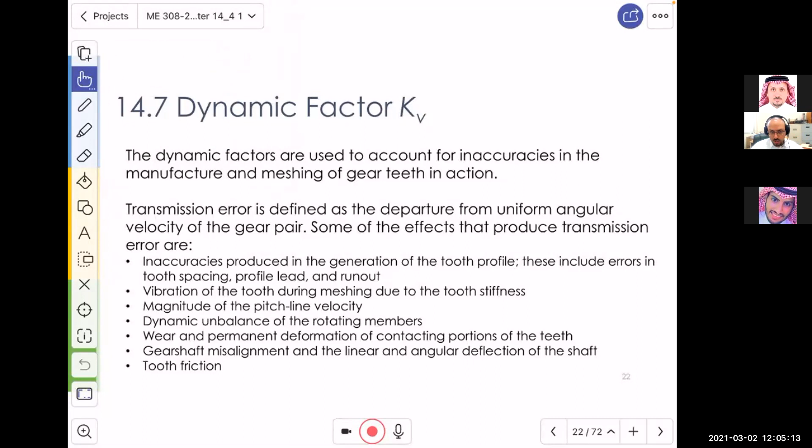Okay, so the dynamic factor, ya shabab, if we talk here, we said that the dynamic factor was established to include or consider effects due to the generation of the tooth profile, dynamic vibration, and so on.

And we said that what AGMA did, or at least we kind of touched on this, is that they established a quality number. And the quality numbers go from 3 to 7 for most commercial quality gears, and from 8 to 12 for high precision quality gears.

When we talk about high precision, it means something very critical, related to impact on lives directly, or significant loss. As I said, if you send a space mission to Mars and land a rover there, which happened like two weeks ago, you would not expect the rover to have commercial quality gears. There is no way, I wouldn't believe this. The whole mission costs you 6-7 billion dollars, and then you go and buy commercial gears from the market. I wouldn't believe this. And if the rover stopped working because of a problem with the gear, this is so funny, you understand?

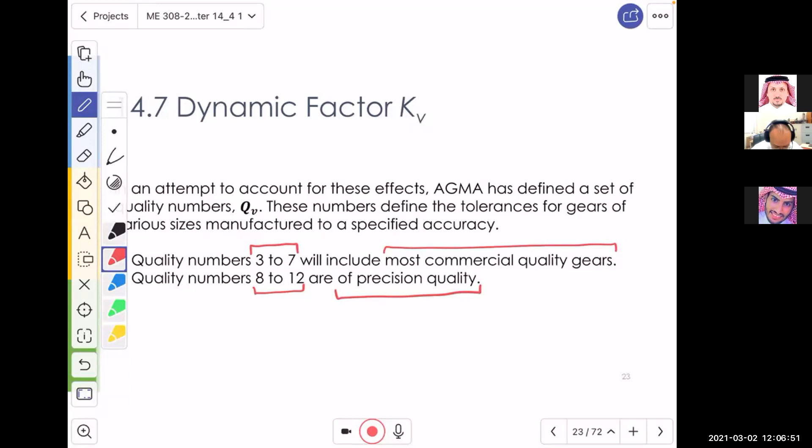But I want you to know the edge over here. So commercial means everything around us in the industry. But of course, there are sensitive places, sensitive industries, and this is where high precision might be used.

So if you go buy a commercial gear from the market, you would just use a suitable QV. Then from this, you will find B. And by knowing B, you can find A. And by knowing A, you can plug it in there with the velocity, and you will be able to find KV.

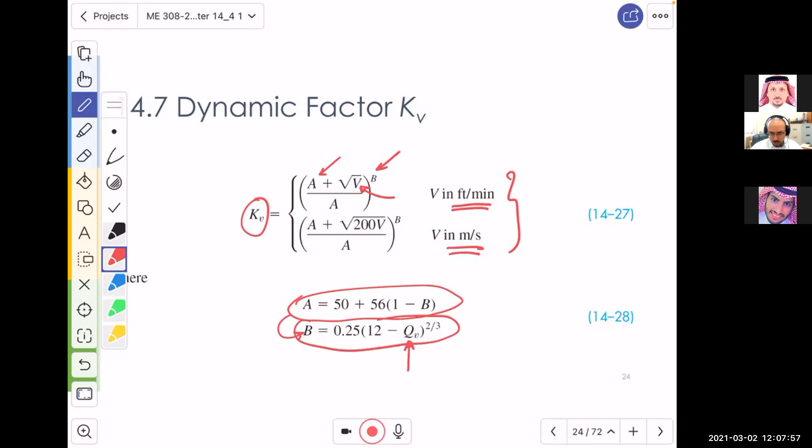What does bound the solution mean? If you are in a design problem and you want to know what is the maximum you're looking for, then this is it. And you know that, okay, I can't go for more, I can probably go down. So bounding the solution is always a very interesting and useful technique in design. This is why it's very important, I want to tell you.

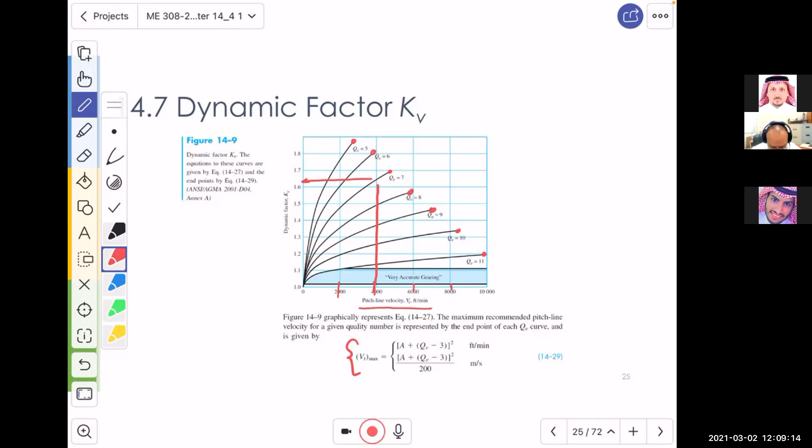Okay, the next one is the overload factor, KO. The overload factor, KO, basically allows you to consider any kind of effect resulting from an overload, other than the transmitted load that you are supplying through the gear.

If you have no idea, it is fair to assume that you have a uniform power source and the driven machine also performs in a uniform fashion or manner. And for that, this is your KO. So for uniform, we have 1.

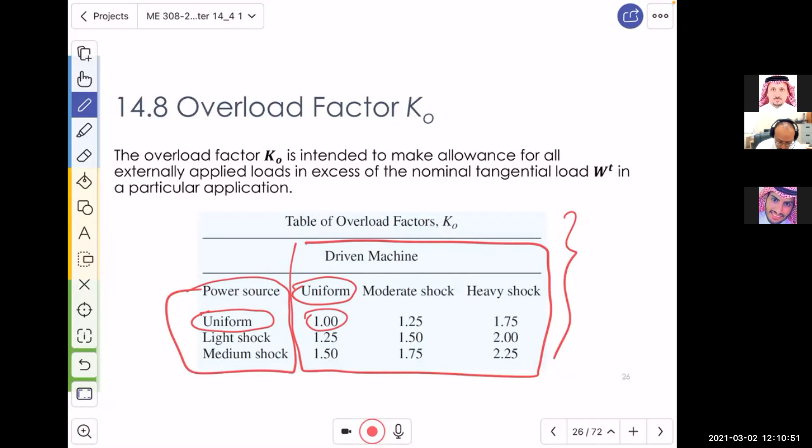If you have a uniform power source but a moderate shock-driven machine, that is possible, where you are supplying the power through a DC motor, and you have put a transformer, regulator, whatever, to ensure that the power source is always uniform. But the operation has moderate shock. Like, for example, if you use that gearing mechanism to drill, you cannot guarantee underground or through the wall that the formation is always uniform. So you may get through a sandy segment, and then all of a sudden a hard rock segment, and this changes the whole mechanism.

And there are plenty of things, for example wind. You can imagine that in places where there is significant wind, you can have this shock because of the wind, and it may be moderate or it may be heavy.

So if you are the designer and you don't know this, then you better go and ask your client, understand the need, and see basically what are you designing for. What are the possibilities? If you are just an analyst, go and ask him. Tell him, does your application involve shock? Is the shock coming from the source, or is it coming from the driven machine? What causes the shock? This is where you will understand how to estimate this.

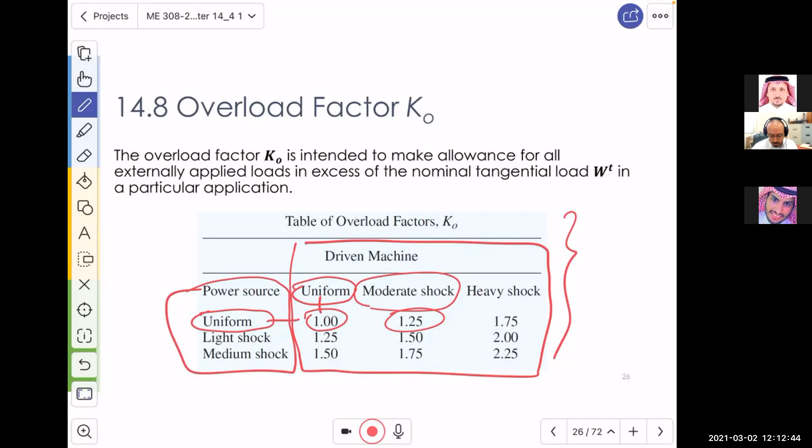If nothing was mentioned, you can comfortably assume that this is uniform. Okay? All right, but be careful. Never create a problem of your own. You're designing something, you know everything, and just because you are ignorant and did not think about shock, you say, no, I assumed it's uniform. I am the designer, I can assume whatever I want. Of course you can, but you may make the wrong assumption. So be careful with that.

So what does the surface condition factor depend on? It depends on the surface finish, which can be affected by cutting, shaving, lapping, grinding, and shot peening. Let me stop here for a few minutes, it's worth it. Shot peening is a very common, well-known surface modification process.

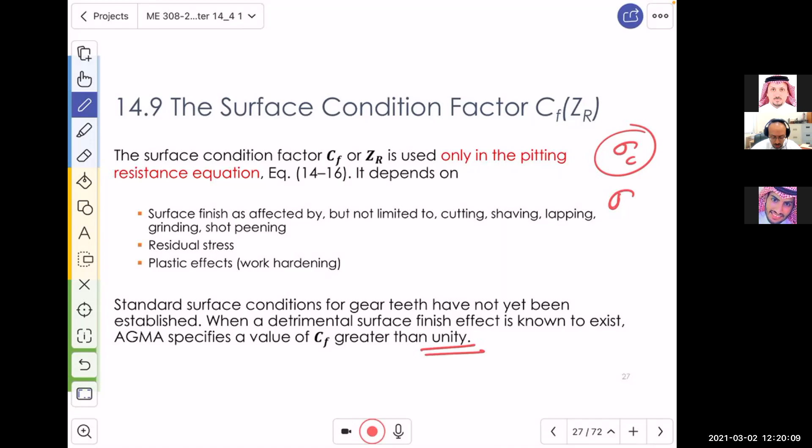So when should you assume it to be otherwise? Well, if you have a serious problem and you have a tabulated or figure or standardized analysis. If you don't have it, you need to consult a research or development center, a commercial lab, or a university to compute this effect for you. But as of now, it is 1. At least you got rid of it, you don't need to worry about it.

Now why is that? I would like you to remember always the fishing rod analogy. If you look not at the fishing rod, but the fishing string, the one you use in the reel — it's a little tiny plastic, and I need to be careful here, I'm not trying to compare apple to apple, because that little tiny string is made from a polymeric material. Polymers don't have grain boundaries like metals, so the concept of defects due to grain boundary, solidification, hardening, and so on doesn't apply there.

But what I would like you to understand is that this little tiny polymeric material is so strong, really strong, it's very hard to cut. It's mainly due to the fact that it is small. So even if you make the same string out of metallic material, that string being a few hundred microns in diameter is going to have way better strength than the same material making a bulk piece or even a tensile specimen. You take a tensile specimen for the same material, you pull it, and you find the strength is only 100, 200 megapascal.

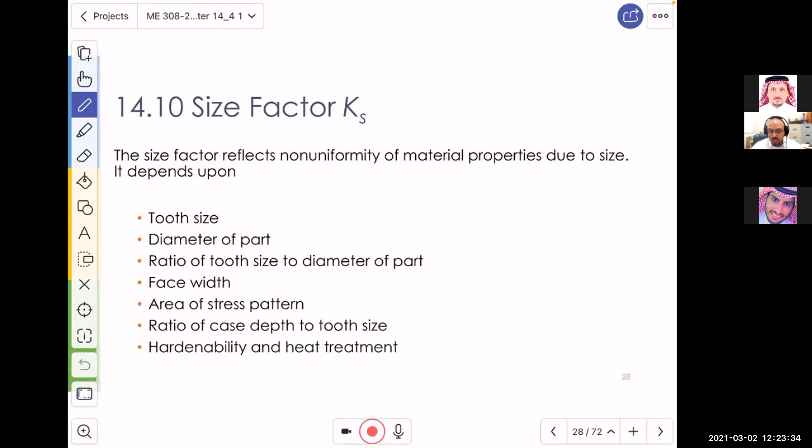For example, if you want to make a big gear, ensuring during the manufacturing that the property of that gear is uniform - you measure the grain size here or there, is it the same - is very hard, really hard. So that changes the idea of the strength and so on.

So what is the factor? Again, AGMA does not have any standardized procedure for the detrimental effect. You know what detrimental means? The detrimental size effect means the negative effect of the size. So they advise you to use unity, 1.

But if there is any reason you think you need to find KS, there is an estimated procedure. The derivation is written in the book in one paragraph. Basically, KS is the reciprocal of KB, and KB is the fatigue size factor, if you remember it. Recall that KB was a function of the diameter, or the effective diameter, of the shaft or rectangle - we showed you how to do that.

So the procedure described in that paragraph of the book shows how we draw the analogy between what is a diameter in KB, and what is, here, a face width, a diametral pitch, and the Y, which is the Lewis factor I spoke about before. I told you the Lewis factor is in section 14.1, and you will hear about it, but we did not cover it - it's an omitted section.

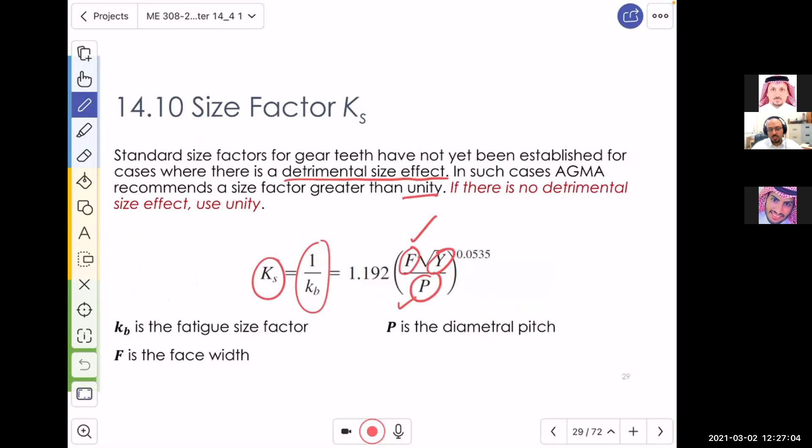Now the next factor we'll talk about is the load distribution factor, KM. This comes from the fact that, in general, a shaft needs to sit in two bearings like this, preferably. We know that if we draw, in an exaggerated way, the deformation of the shaft, it will look like this - there, that's the mid-span.

The mid-span - if you remember, when we used to estimate the deflection using the deflection equation and take the boundary condition, we know that for such a problem, the boundary condition at the mid-span, at L over 2, is that the slope, dy over dx, equals zero.

Now, when you put the gear there - I'm going to draw it in an exaggerated way - if I draw the gear there, then the gear will sit like this, right? But if I imagine, just imagine, who is it?

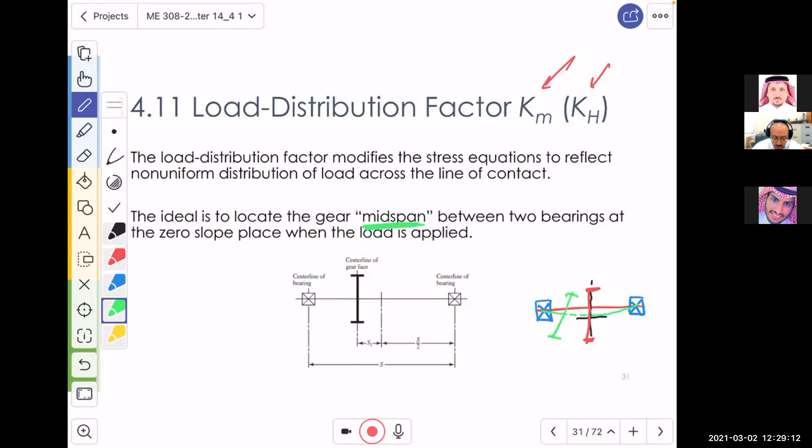If I put the gear in here, then the gear would look like this. This is an exaggerated image, of course, but you can imagine that this is the role of the load distribution factor. It's due to the fact that we are not mounting the gear in the midspan.

This is not always possible. So what should we do? Well, AGMA provides this procedure, at least in the book, that we can find a coefficient that will take care of that effect. But we need to make sure we satisfy 4 conditions.

What are these 4 conditions? First, the face width F divided by the pitch diameter of the pinion is less than or equal to 2.

The second condition: the gear element is mounted between two bearings. This is the gear, and this is the bearing, and this is the bearing. What about if I have a gear, a shaft, and then I put a bearing here, another bearing here, and then I put the gear here? Who can say no? Nobody, I can do that.

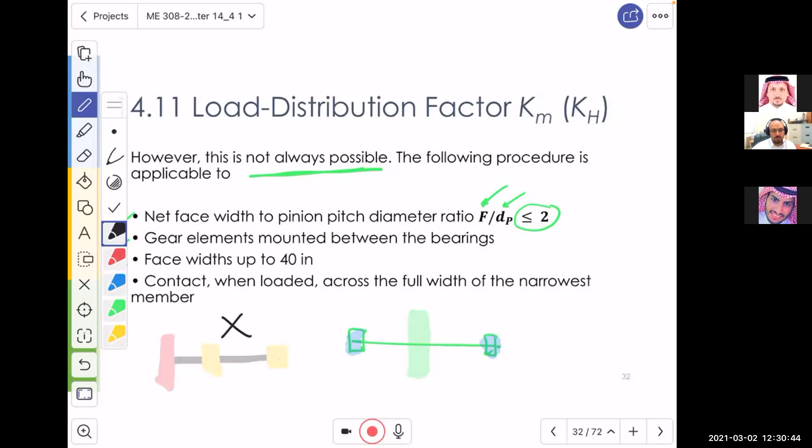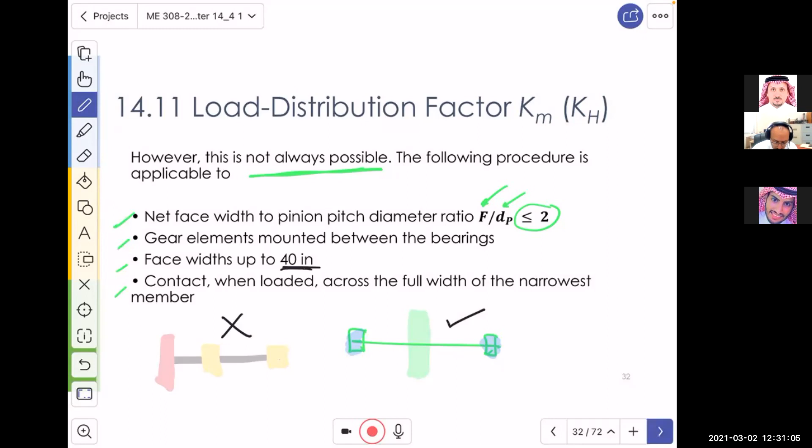As per this procedure, we are not allowed to use it if this is the case, and we are allowed to use it if this is the case. So what else? The face width should not exceed up to 40, and the contact when loaded across the full width of the narrowest member, meaning the contact between the gears themselves.

Now what is that factor? Although we call it Km, because of these limiting factors we don't have a general Km. What we have is a limited Km, load distribution factor, for these 4 conditions. If we follow these conditions, ya shabab, you should expect that for this course we will only follow these conditions, because I am not going to give you any other conditions which we don't have information for.

So if we use that, we will call this factor the load distribution factor CMF. As per this textbook, Km is the same as CMF, but for these 4 conditions. And the equation is 1 plus CMC, CPF, CPM, CMA, and CE. Funny, right?

This is too funny. You will discover that each one of these might be a function of another function, and it just keeps going like this. Before I jump into how we find CMC, CPF, and so on, let me tell you one thing, and please listen carefully, because one day you are probably going to do this.

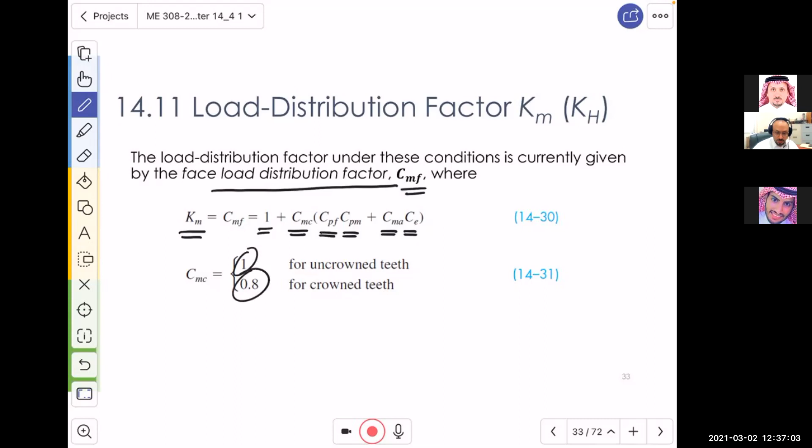If it is uncrowned, then CMC equals 1. If it is crowned, then it is 0.8. You move on. Now I'm going to keep the equation on top. We just found this related to crown and uncrown.

So the next one is this: go and find the face width divided by 10 multiplied by the pitch diameter of the pinion. Then, by knowing the face width, is it less than 1? Use this equation. Is it between 1 and 17? Is it between 17 and 40? And there you go, you have one single equation for each case.

Now you should know a few things. First, there is a list of the same equations in your textbook for millimeter SI units, so you should know this. The next thing, there is a note here: if you calculate this ratio and it turns out to be less than 0.05,

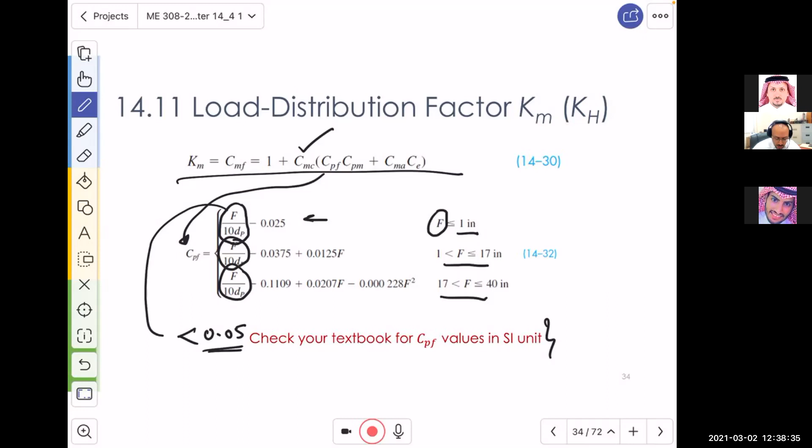then you must use 0.05, which means this ratio should never be lower than 0.05. If it is lower, use 0.05. Understood? Then calculate the rest by knowing what F is, just supply F. This is the comment about not using less than 0.05.

Now the next thing is CPM. What is CPM? CPM can be 1 or 1.1. How do we know? First, it is related to straddle mounted pinion. Both of them are straddled. You ask me, what the hell is a straddle?

What does it mean? I'm going to show it to you, I'm not going to just speak about it. Don't worry about it. But how do you know which one to use?

Well, you have the total distance between the two bearings, and you need to divide it. This is the total distance between the two bearings, so basically this is the mid-span. You want to measure the distance between the mid-span and the gear element, which is S1. Then calculate the distance between the two bearings. Take the ratio: if it's less than 0.175, and of course you have a straddle mounted configuration, use 1. If it is greater, then it is 1.1.

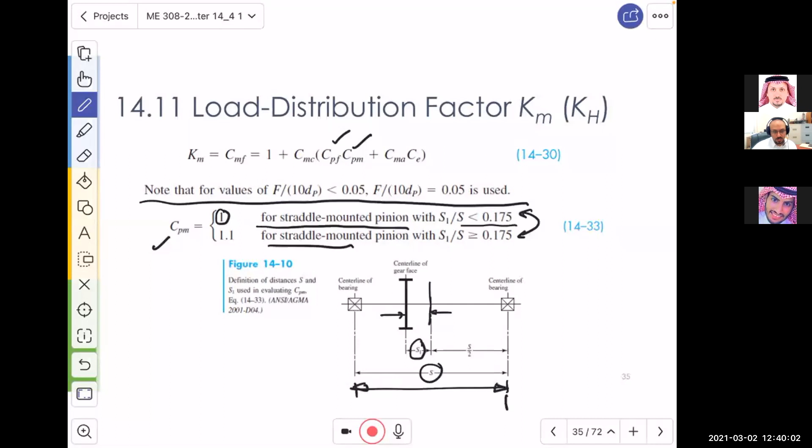Now the question, what is a straddle? It's a very simple gearing method. If you recall, just a few slides ago, I told you we are only considering a configuration where the gear element is mounted between two bearings.

That's a straddle. So what is the shape of it? This is a real element, I think it's from Ford, I searched and it's from a Ford truck. And if you look, interestingly shabab, these are two thrust bearings, tapered, aligned opposite to each other to cancel the axial load out. Then we have the pinion right here, and after that we have a bearing here. So this is the configuration which we are talking about, it's called straddle.

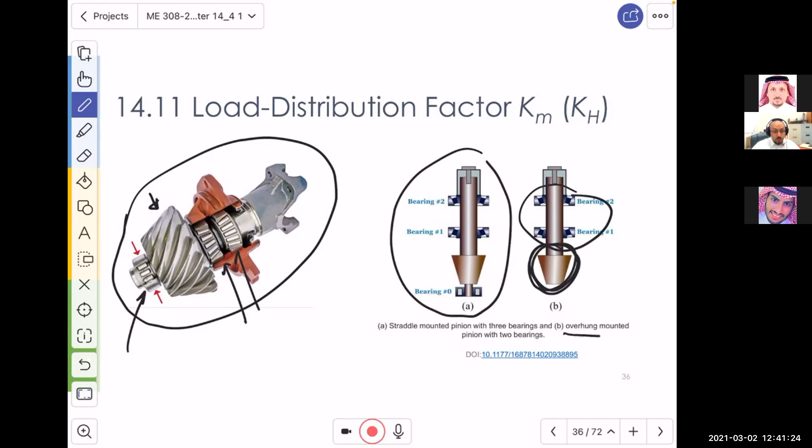If you got bearings right there, and then you have the gear at the end, then you consider this as not straddle. It's actually overhanging, which we are not talking about at all.

Shabab, can you continue the recording? So this is basically what we were talking about, the straddled and not straddle, and you have seen the images yourself. Let's move on.

The slides are coming, so now we go to the next one. The next one is called the mesh alignment factor, Cma, given to you as A plus BF plus CF squared, where F is the face width. Now, what are A, B, and C?

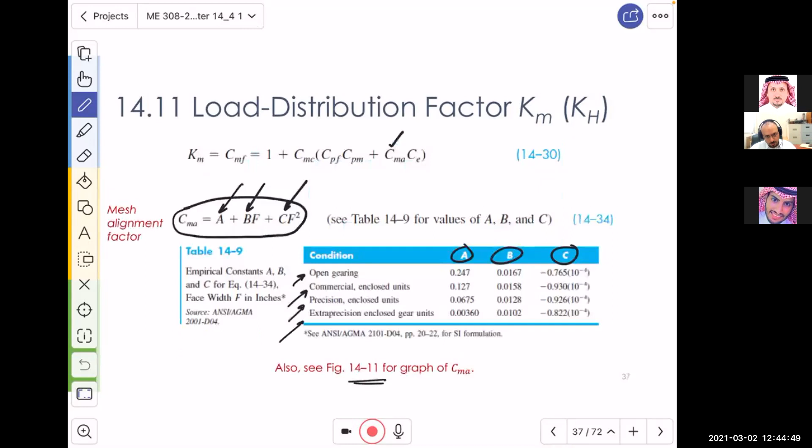A, B, and C are tabulated for you, and they are a function of the type of gearing or condition: whether we have open gearing, a commercially enclosed unit, or a precision or extra precision enclosed unit. These are available in the figure: open gearing, commercially enclosed, and precision and extra precision. So you look at the face width, and from the face width, you can find the value for any one of these. This is basically a tabulated numerical value of figure 14.11.

Now the last thing, CE, is related to this. If you have a condition where the gear has been adjusted for assembly, or you have done some lapping for compatibility, or you did both — any sort of modification that falls under this category — you will have CE equals 0.8. If there is no special condition, everything is normal, this is for all other conditions, CE equals 1.

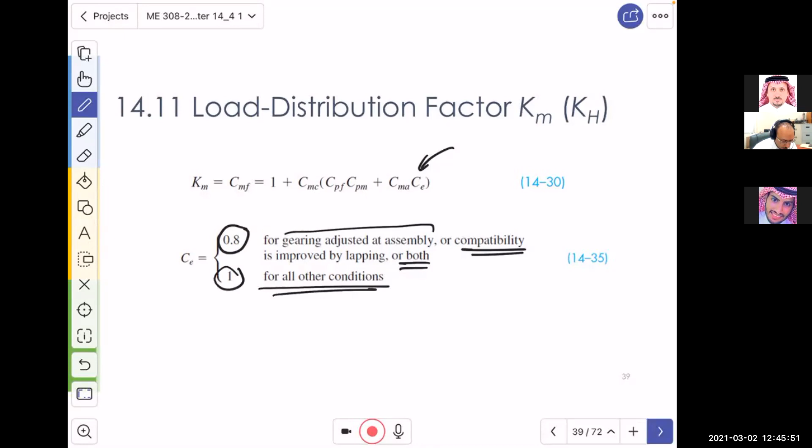Now the hardness factor is the next one we are going to talk about, and we probably will not have time to finish it up, but I want to read through this slide with you. It's very important. The pinion generally has a smaller number of teeth than the gear, and consequently it is subjected to more cycles of contact stress. So there is more contact happening on the pinion than on the gear.

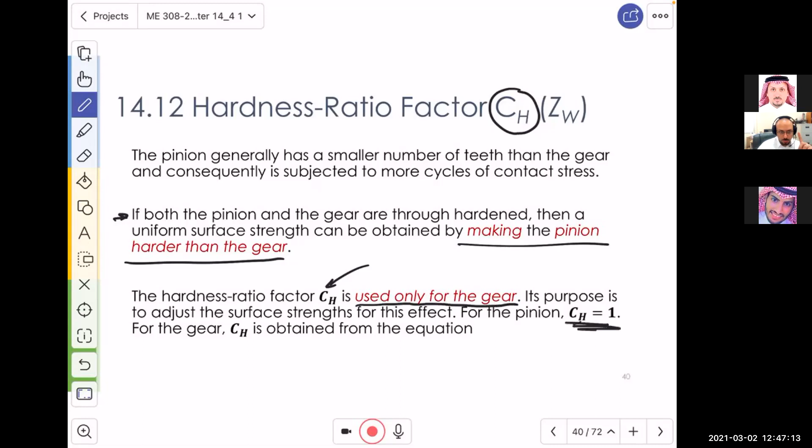If both the pinion and the gear went through some hardening, then a uniform surface strength can be obtained by making the pinion harder than the gear. Since the pinion is being hit in contact more than the other, you need to make it harder if you want the strength to be equal. In that case, you only apply CH, the hardening factor for the gear. Look at it — it's used only for the gear. CH for the pinion is considered to be 1.

Now what is the equation? How do we calculate CH for the gear? It is equal to 1 plus A prime times (mg minus 1). A prime is some coefficient, some number. And we have a hardness ratio — this is the Brinell hardness that we all know, but as you see, it says the Brinell hardness for the pinion divided by the Brinell hardness for the gear.

This equation is valid for a ratio such that HBP divided by HBG, the pinion over the gear, is less than or equal to 1.7 and greater than or equal to 1.2. You must make sure these hardnesses are measured using a 10 millimeter ball at a 3000 kilogram load — this specification for the hardness should be provided. You should know what was used to measure hardness.

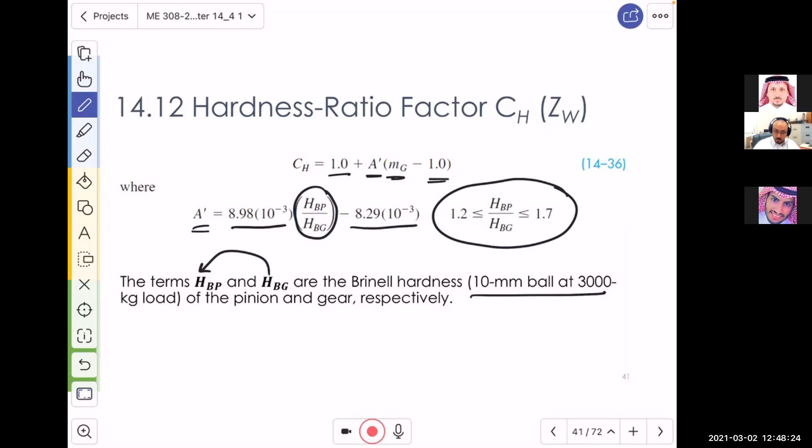Now, next, we need to find mg. Mg is called the speed ratio, which is, by the way, the famous gear ratio, Ng over Np.